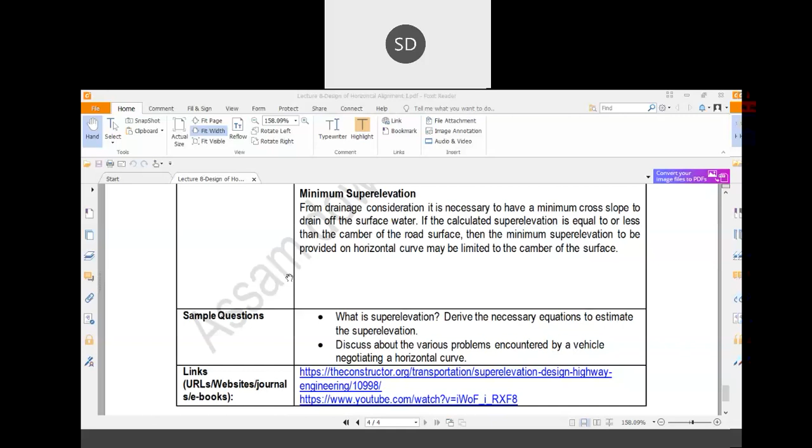So what I was telling, those questions are basically very basic things. If you want me to go slowly over the question, how can we complete the syllabus? Your sound is not clear, sir. If sound is not clear, you should tell me at the start of the class, not now after I've finished. Now you're telling me my sound isn't clear? I'm not arguing, I'm just saying the sound isn't clear now.

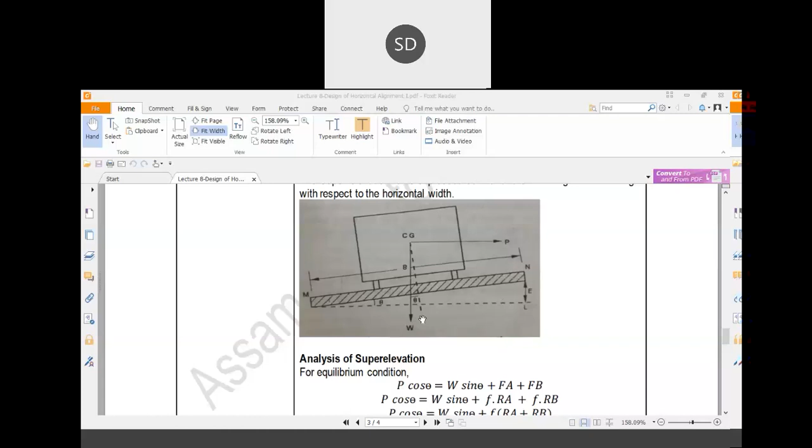Another thing about the super elevation portion we studied, that concept was already there in your school standard, maybe class 9, 10, or 11, 12. There are some advanced portions in transportation here, so for that reason I want to go through some portions quickly, otherwise I cannot complete the major portion like design of pavements and other things.

Okay, so that's why basically I have... Sound is breaking, sir, your sound is breaking now. Is it clear now?

Is it clear right now? Yes, sir, yes, it's fine now.

Okay, so basically that's why I have given you all the notes before the start of the classes, because the syllabus of this subject is huge. That's why I have given you the notes so that you can have some idea or go through them before the class starts.

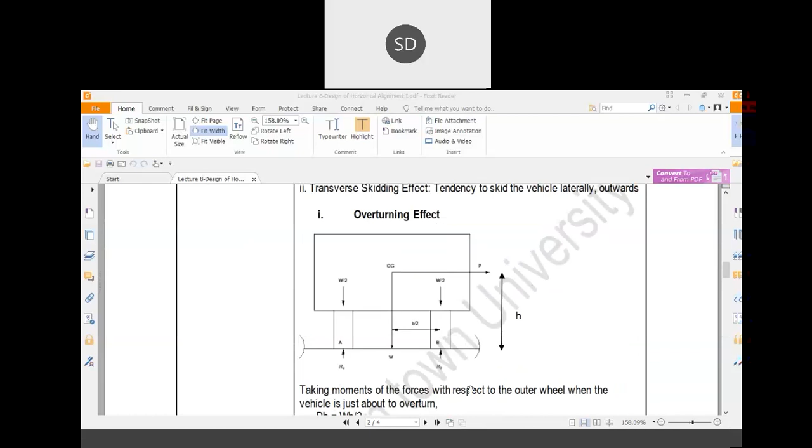Another thing, suppose in the numerical portions or the derivation portion, if you feel any difficulties, just tell me at that time, okay, so that I can manage according to your needs.

For the numericals of your first sessional, that is stopping sight distance and overtaking sight distance - in the overtaking sight distance question, you have to calculate the spacing of vehicles, and all the data is given. From the derivation itself, you know there is an equation: for spacing, that equation is 0.7v plus 6. So you just have to calculate the speed in meters per second and put that in the formula to find the spacing.

So is there any difficulty in this, or anything technical in that numerical? Nothing is there - you simply have to put the values of the problem into the equation, whatever is given, and you will get the result. So basically that is the thing.

So if you are expecting that this type of easy thing could be taught in your fifth semester class, that is a high expectation. I should say that is a high expectation, because I am also expecting something from you - that you are already familiar with all the basic questions and understand whatever I am telling, which is why you didn't raise any questions in those lectures.

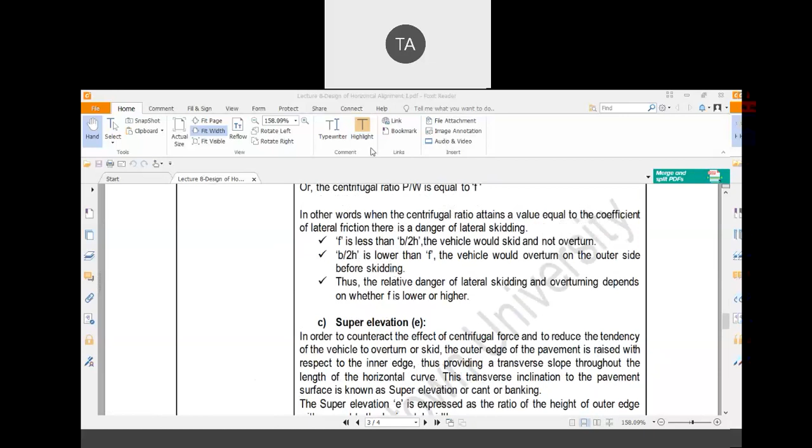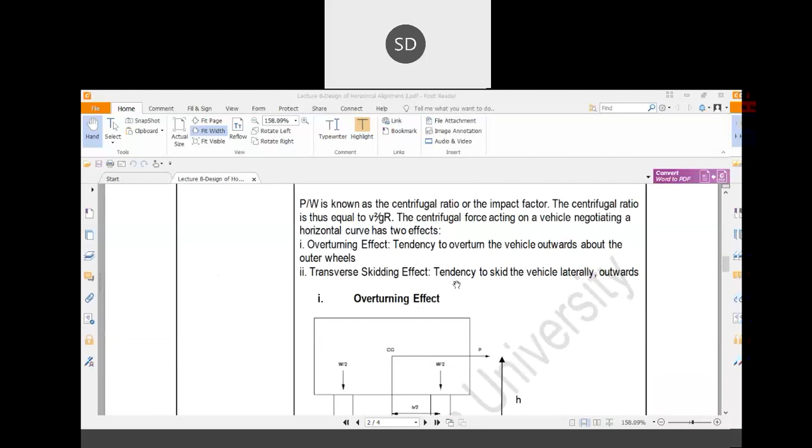So I'll go slow about the derivation portion. If you can, sir, make notes for derivation and numericals in a simple way and send them in the group. The notes and derivations are already there in your lectures, whatever lecture notes I have shared, and believe me, that is the easiest way to elaborate all these things.

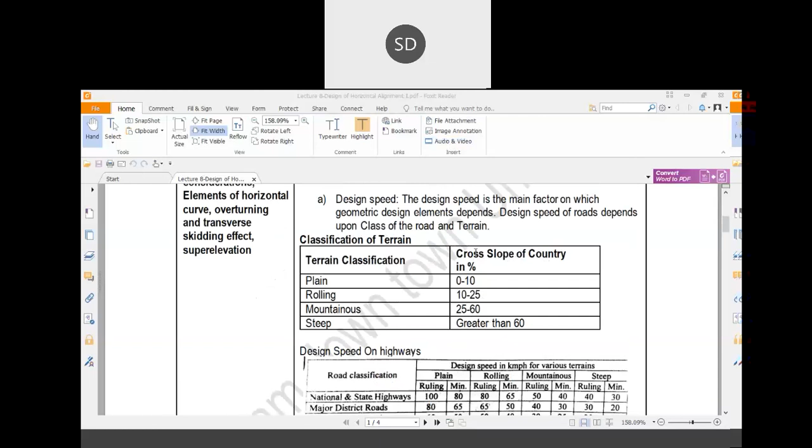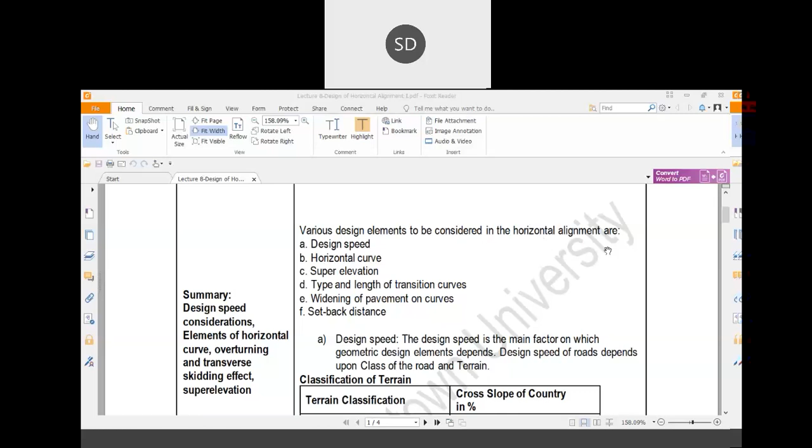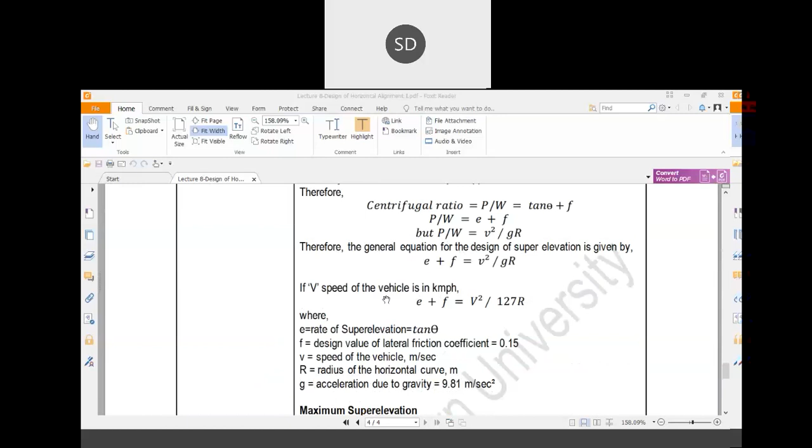For the derivation portion, for your semester, you just need the final equation. You just remember it - the derivation portion is basically not in your syllabus. The derivation portion I have included just to make you understand about that equation, but for your semester only the final equation is required. So for super elevation, only this portion is required: E plus F equal to V square by GR. That is basically only what's in your syllabus.

Nothing else is there - that derivation portion I have written in the easiest way possible, you cannot find an easier way to understand what is happening. But your main equation is this: E plus F equal to V squared by GR. In your semester, you just have to use that final equation and solve some simple numericals. Suppose E, V and R are given, you have to find F. Or suppose F, V and R are given, what is the value of E? That's why I'm going through this first, because that derivation portion is not in your syllabus.

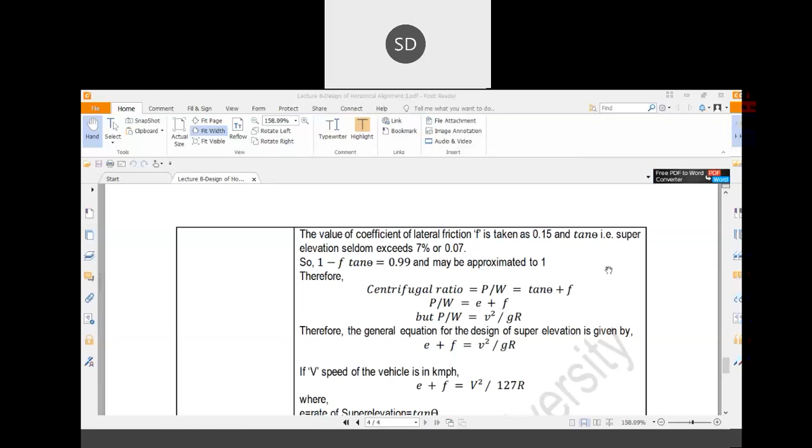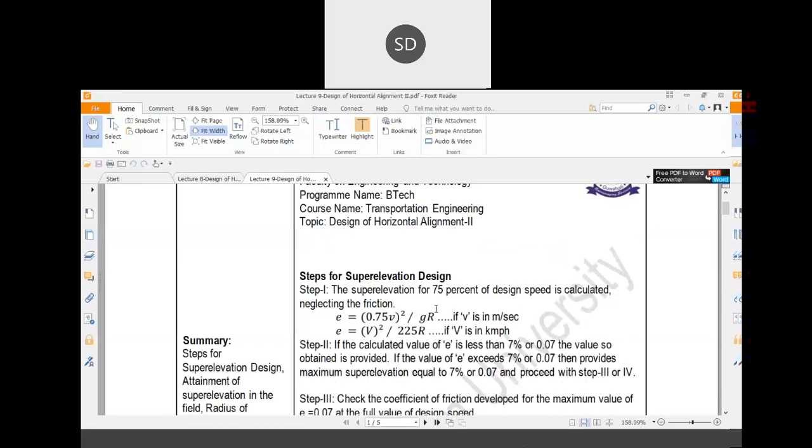Let me start the next chapter. First we will discuss one numerical. For the previous case, we already discussed the super elevation design, where the formula was E plus F equal to V square divided by GR.

Now, let me discuss one particular thing which is very unique to our country. In foreign countries, there is little variation in the type of traffic moving over a road - suppose there are only cars, and if there are trucks, there is a separate lane for trucks. Everything is organized like that. But in Indian conditions, in a particular same road stretch, all the different types of vehicles are moving together.

So basically, on one particular stretch of road, you can observe buses moving, cars moving, auto rickshaws moving. In some cases, bullock carts are moving, and horse-drawn carts are also moving.

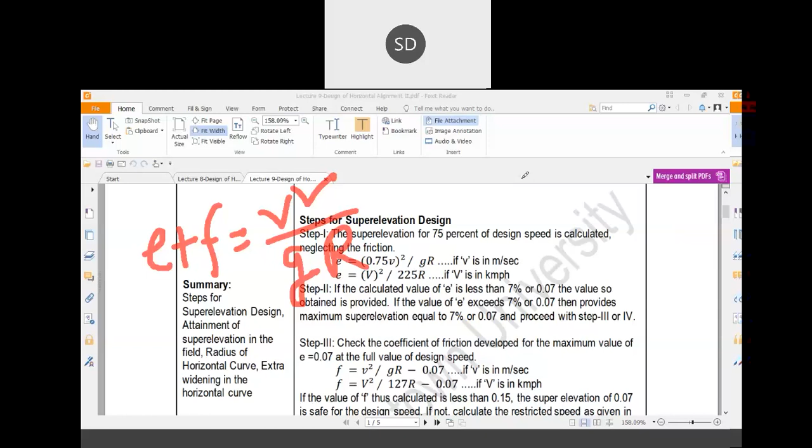So if you go for the design speed as per the documentation, what will happen? Suppose you are designing with a design speed of 80 kilometers per hour. In such cases, an auto rickshaw cannot go up to 80 kilometers per hour; its maximum speed may be 40 kilometers per hour. So if you design your superelevation keeping in view the 80 kilometer per hour speed, there will be a very large rise of the outer edge of the pavement with respect to the inner edge, with respect to the auto rickshaw. So there will be chances that the auto rickshaw cannot move over that particular horizontal path.

So basically what I'm trying to say is, if your speed is more, your superelevation would also be more, because your superelevation equation is E plus F equal to V squared by GR. So as your speed increases, your superelevation increases. So for 80 kilometers per hour your superelevation may be one value, but for 40 kilometers per hour your superelevation will be lower.

So if a vehicle with 40 kilometer per hour speed is moving over a road which has a superelevation designed based on 80 kilometer per hour speed, what will happen? The vehicle will be skidding in the inner direction, or the vehicle may overturn inward because of the high rise of the outward portion. So accidents may happen.

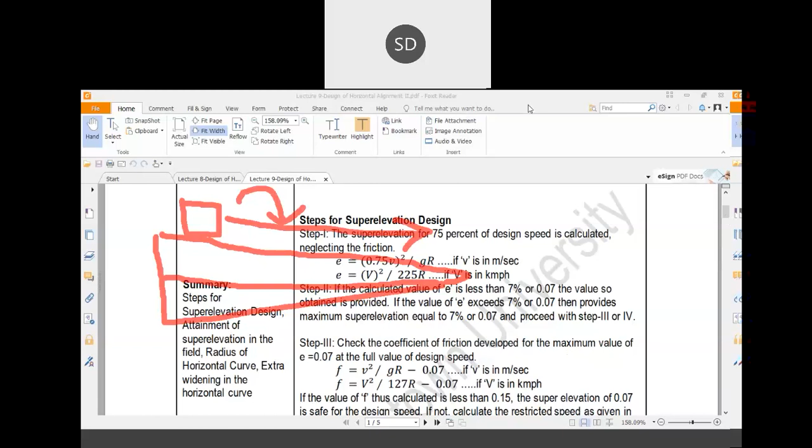Therefore, for mixed traffic conditions, there are some steps you will have to follow to design your superelevation. There are four steps. The first step is to design the superelevation considering 75% of the design speed and neglecting friction. Now how does this happen?

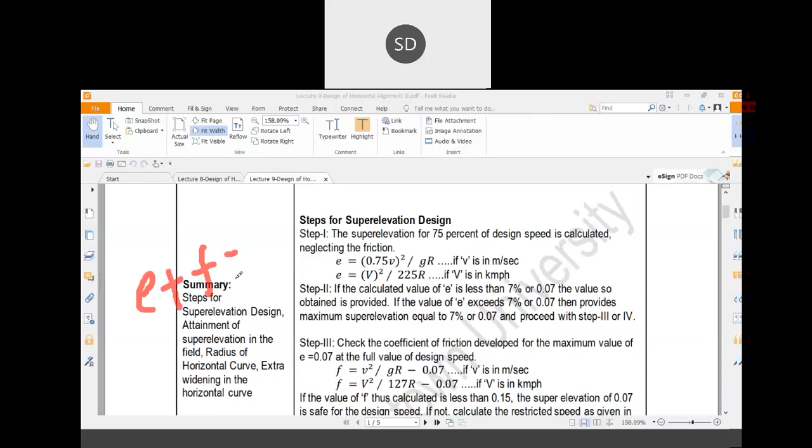Your equation was E plus F equal to V squared by GR. So you are neglecting friction, that is F value is 0, and you are considering V as 75% of the design speed, that is 0.75 times V. With this you are calculating the superelevation E, neglecting friction and considering 75% of the design speed, where V is in meters per second.

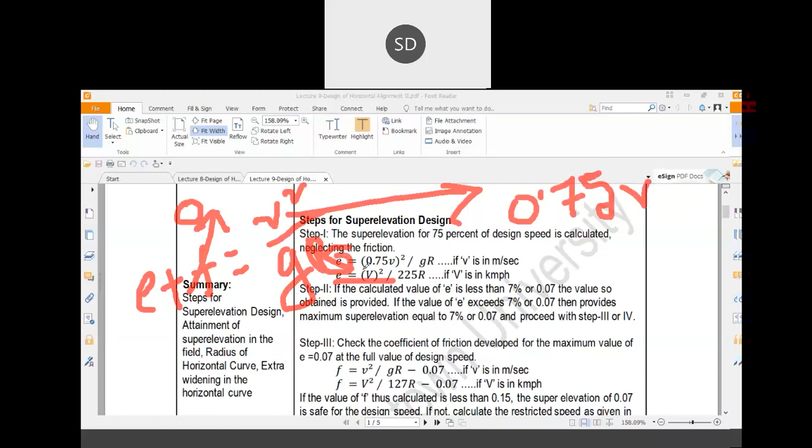Step number two is checking whether the superelevation is within the limit or not. As per IRC recommendation, the maximum superelevation limit is 7%, or 0.07. So from the first equation, if you get a superelevation value of more than 0.07, you have to consider the maximum superelevation of 0.07. If in the first equation you get a value lower than 0.07, then it is okay, your design is finished.

So suppose using equation one you get a superelevation value of 0.05. In that case, whatever value you get is your design superelevation, and you can directly proceed with the design of that superelevation. But if you get a superelevation value of 0.09, in such cases you have to adopt a superelevation value of 0.07 to proceed with the next step.

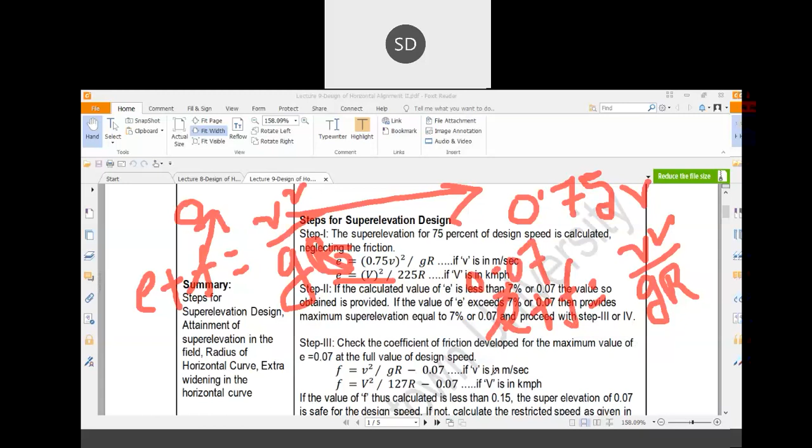Now what is the next step? You provide a superelevation value of 0.07, a full design speed, and you have to find out the coefficient of friction value. So your equation is E plus F equal to V squared by GR. Now considering E value is 0.07, you have to calculate the value of F. So your F value would be V squared by GR minus 0.07.

What is the next step? Now you have to check whether your calculated coefficient of friction value, F, is more or less than the maximum lateral friction value of 0.15. If it is lesser, suppose you get a coefficient of friction value of 0.14, then the 7% superelevation provided is complete. Now, if you get a coefficient of friction value of more than 0.15, suppose 0.17 or 0.20, in such cases, what do you have to do?

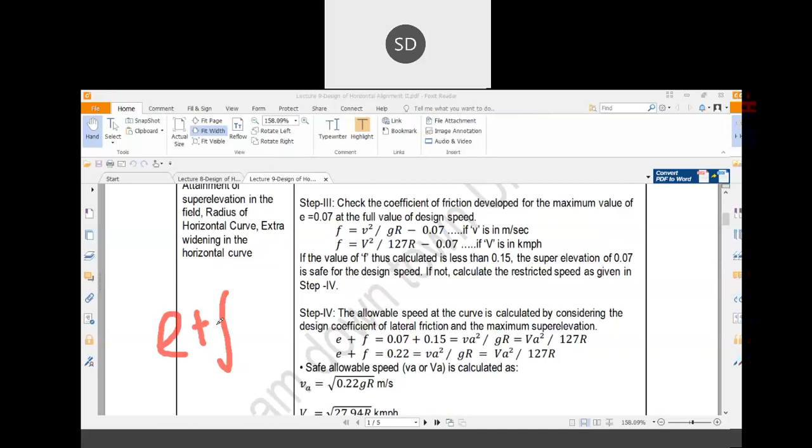In such cases, you have to consider the maximum coefficient of lateral friction value as 0.15, and find out what is the value of speed. So how will you calculate this? Your E plus F equals V square divided by GR. Now your value of E is 0.07 and your value of F is 0.15. Considering these values, you know the value of G and you know the value of R, because radius of curvature is required whenever you are calculating the superelevation, and you can easily estimate the radius of curvature value from the field. So from that you have to find out the value of V.

Now, if the calculated value of V is equal to your design speed, in that case whatever maximum superelevation you are providing, that is okay. If it is more than design speed, that is also okay. But if it is lesser than your design speed, in such cases, what does it indicate? It indicates that the maximum superelevation you are trying to provide over the stretch of road is not enough for a design speed of, suppose, 80 kilometers per hour. So in such cases, you have to provide speed restriction over that horizontal curve.

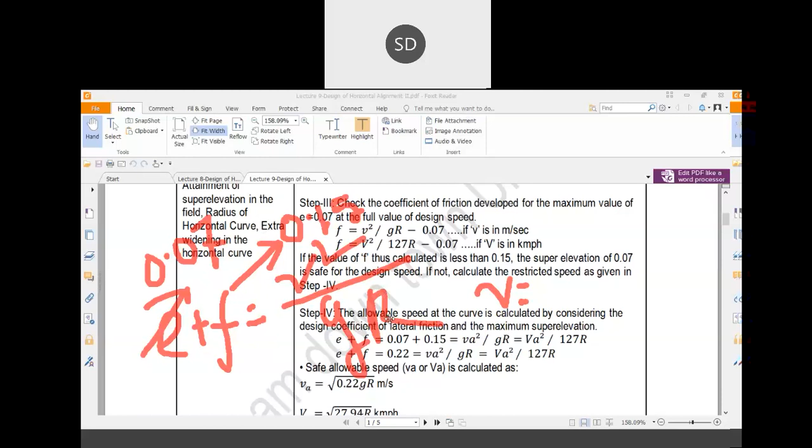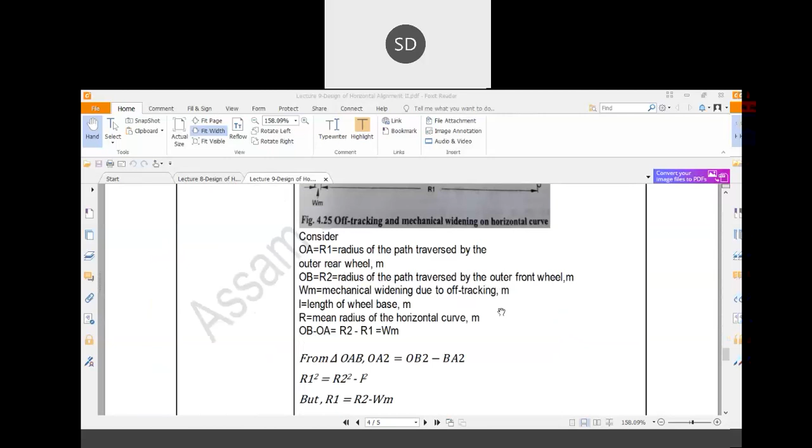I'll discuss this. Suppose one numerical is there: the design speed of a highway is 80 km per hour. There is a horizontal curve of radius 200 meters on a certain locality. Calculate the superelevation needed to maintain the speed if the maximum superelevation of 0.07 is not to be exceeded, and calculate the maximum allowable speed on this horizontal curve.

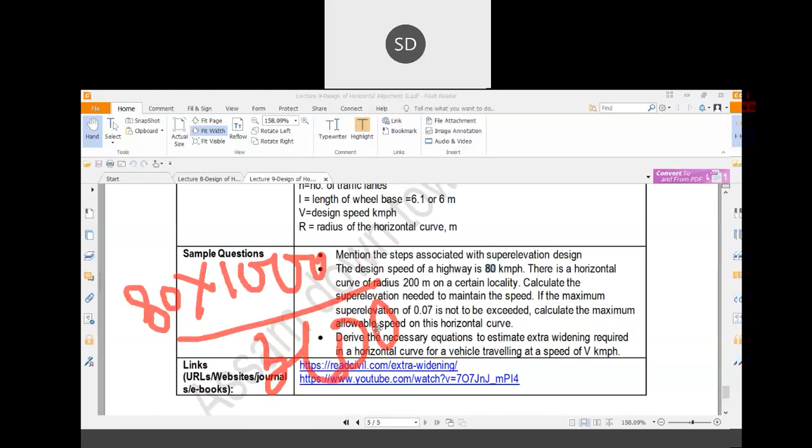So in this question, your maximum speed is given as 80 kilometers per hour. So basically you have to design this for a mixed traffic condition, and in such a question it would be mentioned like that. Here design speed is 80 kilometers per hour. So first thing is, if you remember, all these equations are in meter per second, so you have to convert 80 kilometers per hour into meter per second. How will you convert? It would be 80 into 1000 divided by 3600, so you will get 80 kilometers per hour in meter per second.

Now, there is a horizontal curve of radius 200 meters, so radius R is given as 200 meter. G is 9.81 meter per second square, and your coefficient of lateral friction is 0.15. You just have to remember this: coefficient of lateral friction is 0.15 and coefficient of longitudinal friction is 0.35 to 0.40 depending on the speed.

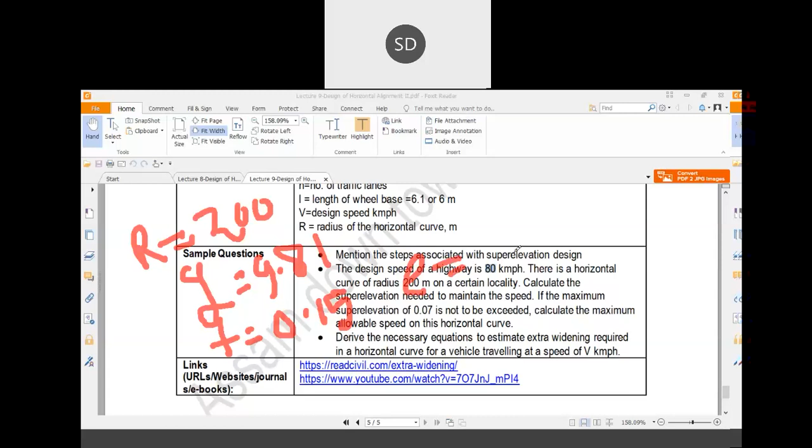Then you have to calculate the superelevation. How do you calculate it? First step is you have to calculate the superelevation neglecting the friction and assuming 75% of the design speed. So your E equals 0.75 V square divided by GR. You know the value of V, you know the value of G, you know the value of R, so you have to calculate the value of E. Can you calculate this and tell me the value of E?

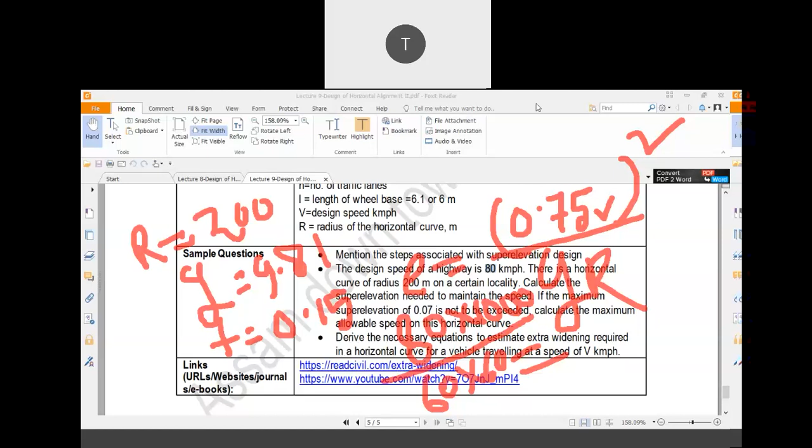The value of E would be around 0.1. Your speed would be 22.22. You will get a speed value of 22.22 meter per second multiplied by 0.75 square.

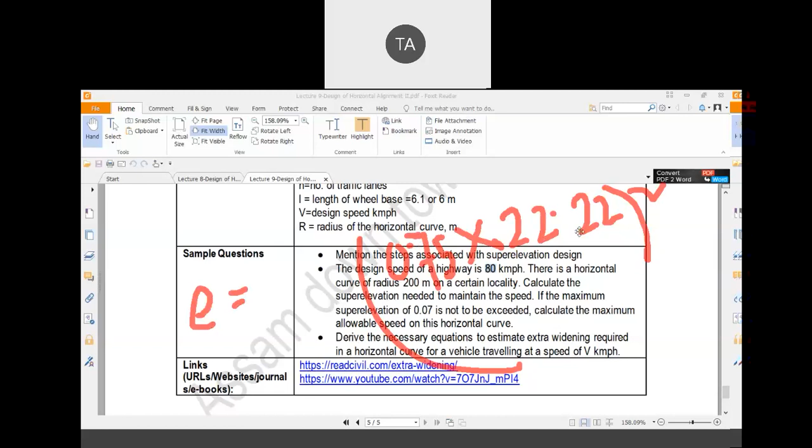That is 277. Which one, 277? The value of E. 0.75 into 22.22, bracket square is equal to 277. 0.75 into 22.22, yes, square value is equal to 277.72.

Divided by G into R. Divided by 9.1, and it comes out like 5662. No, divided by 9.81 into R. G into R, R is there now. R is 200, yes. So it will be 9.81 into 200. And the answer comes out like 5662. No, you have calculated wrongly.

0.75 into 22.22, you will get 16.665. So basically in the upper portion, let it be 16.66 square divided by GR. So 16.66 square, 16.66 into 16.66, the top portion would be 277.55.

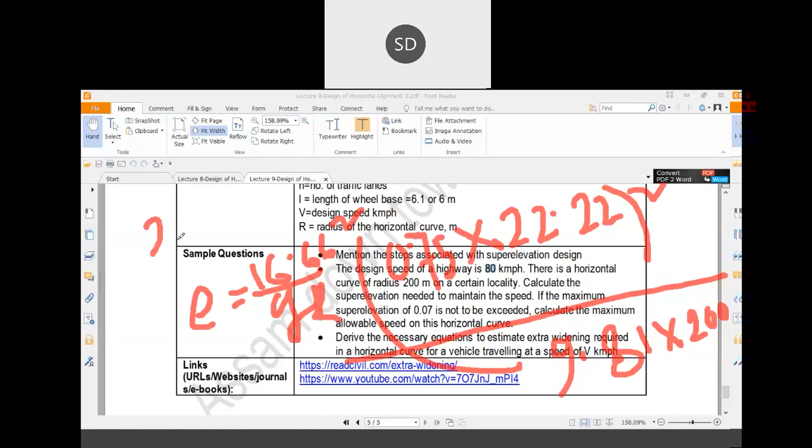1920. 277.55 divided by G, that is 9.81, into R, that is 200, divide. So you will get a value of 0.14. So the value of E would be 0.14.

Is it coming now? Yeah, actually I'm using a scientific calculator, so I get confused. Okay, so here you are getting a value of E as 0.14. But what is the maximum limit of E? The maximum limit of E is 0.07. Okay, the maximum limit of E is 0.07.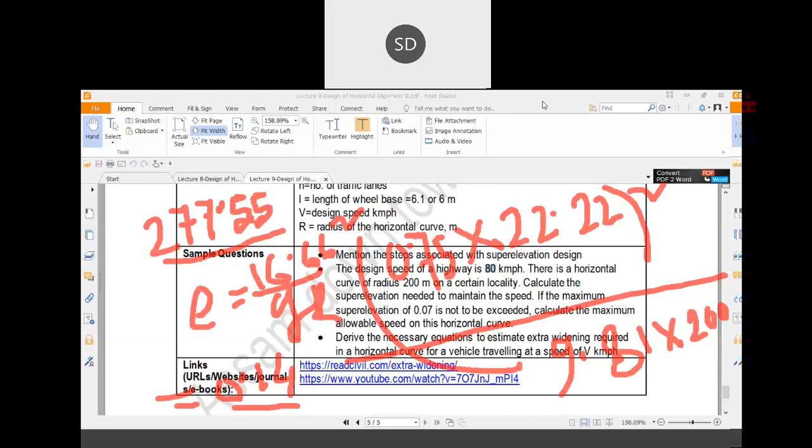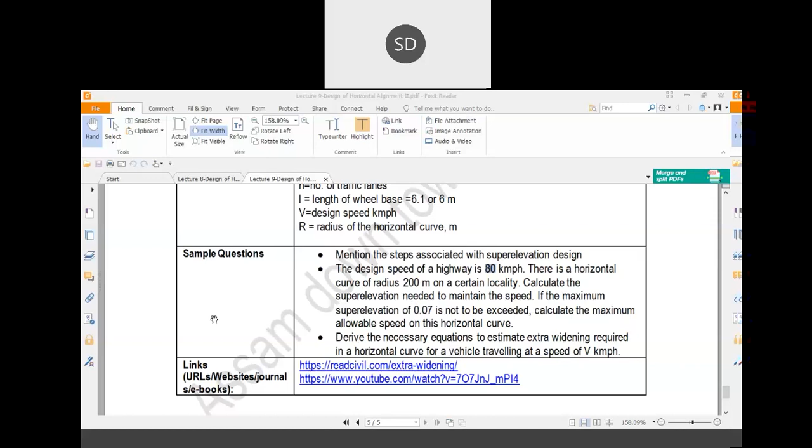You cannot provide a super elevation more than 0.07. So in such cases, you have to go for the third step. What is the third step? Second step is checking; you have already checked and found that your calculated value of E is more than the limiting value, so you go for the third step. What is the third step? Your third step is E plus F equal to V square divided by GR.

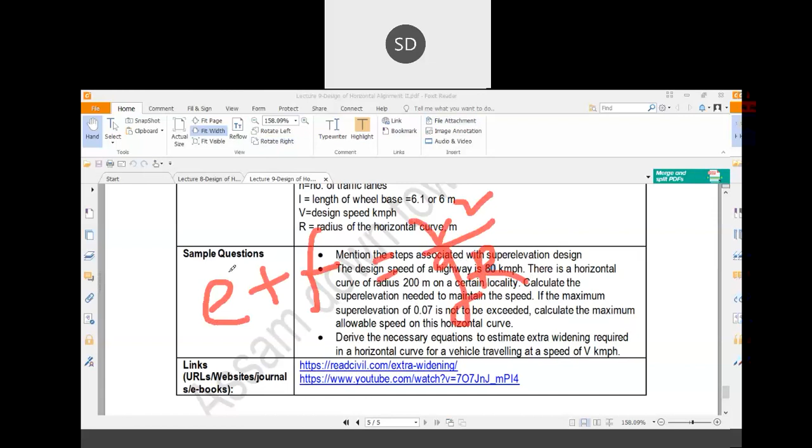Here you have to consider the value of E as 0.07 and find out the value of F. So your value of F would be, here the speed is full speed, that is 22.22 square divided by G into R, minus 0.07. So calculate the value of F.

Okay, the value of f would be around 0.11. So what does this indicate? It indicates that this calculated value of f is lower than the limiting value, that is 0.15. So in that case, you can say that whatever super elevation, that is 0.07, you have provided, is safe for the design. So you can adopt the super elevation as 0.07. You don't have to go for the next step.

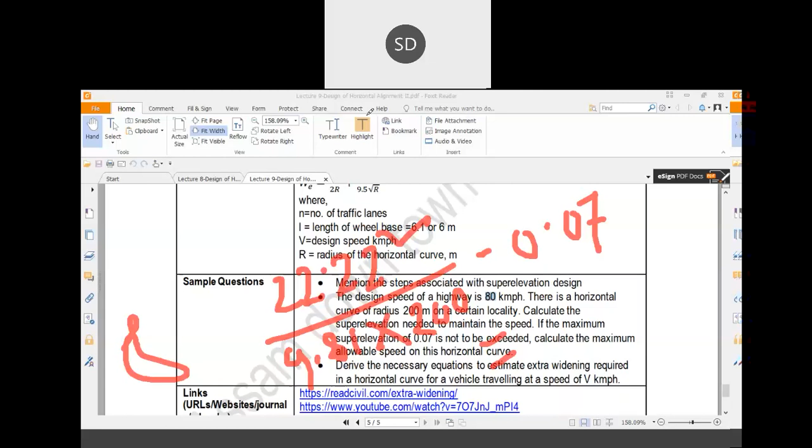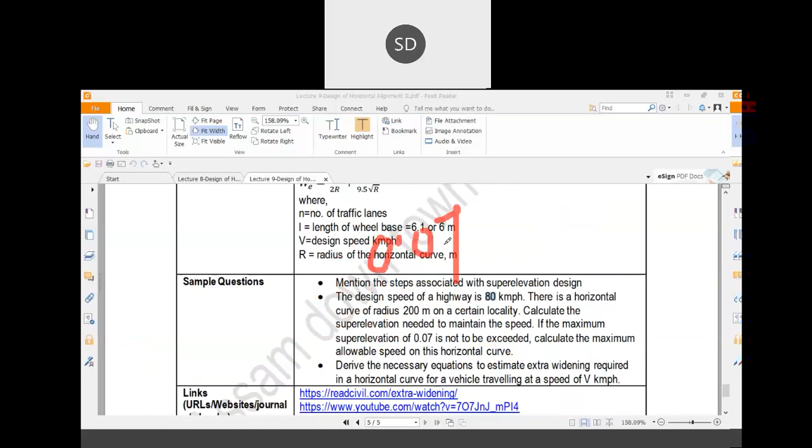Now this calculated value of f, that you are getting as 0.18, is more than your 0.15. So in that case, you have to go for the speed restriction. So how to calculate that speed restriction value? Your equation was E plus F equal to V square by GR. So consider E as 0.07 and F as 0.15, V square by GR. Now you have to calculate what is the value of V. Whatever value of V you are getting, that is basically your speed restriction value.

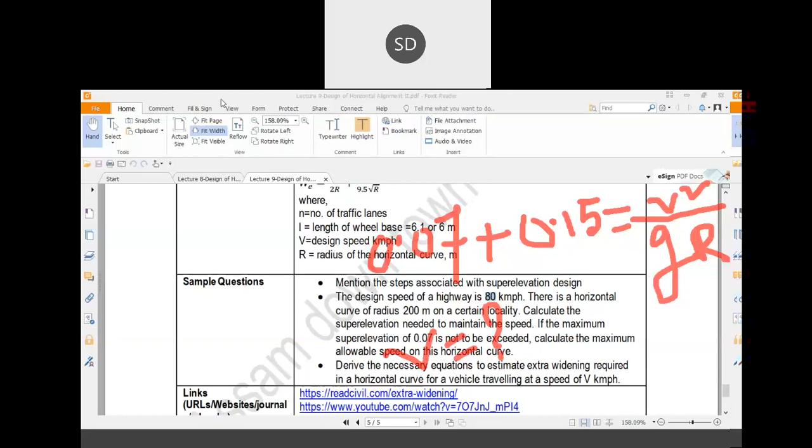Thank you, sir. 0.15 is the coefficient of friction value. E plus F equal to V square by GR. Here F is 0.15, that is the maximum value of F is 0.15. Thank you, sir.